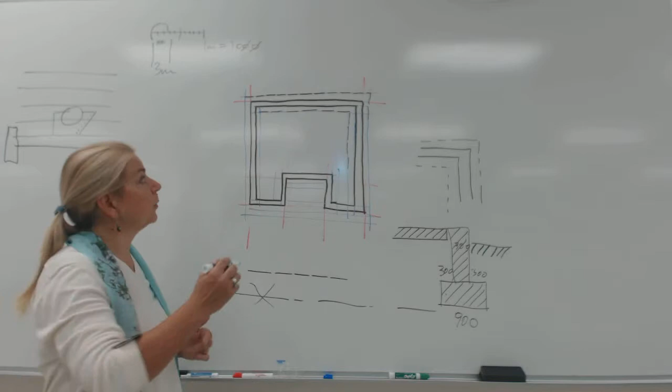Okay, so now we're going to do the hatching, ladies and gentlemen. Hatching is done also at 3 millimeters apart. Every year, students confuse where that hatching is going. We're going to show where the slab is to be calculated. You're going to remember that this is your estimating assignment.

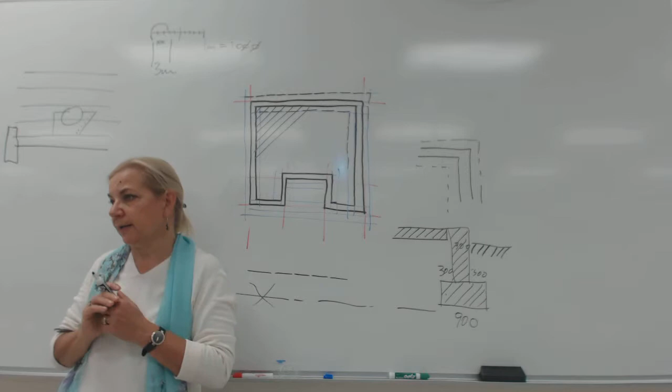So what we're going to do, I'm drawing them darker. These need to be very light lines. You're really going to damage your drawing if you draw the hatching very dark. So your construction lines are very light. Dimensions and hidden lines are medium. The hatching should also be light.

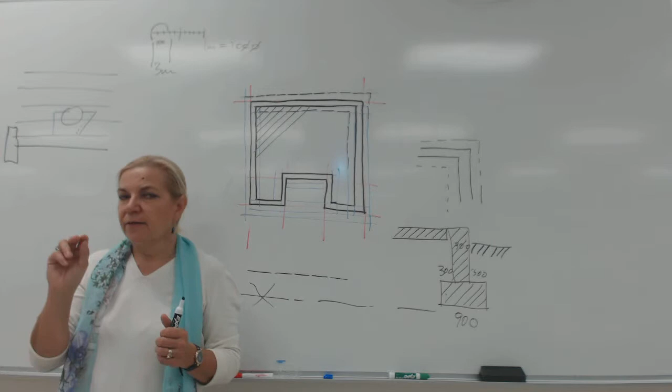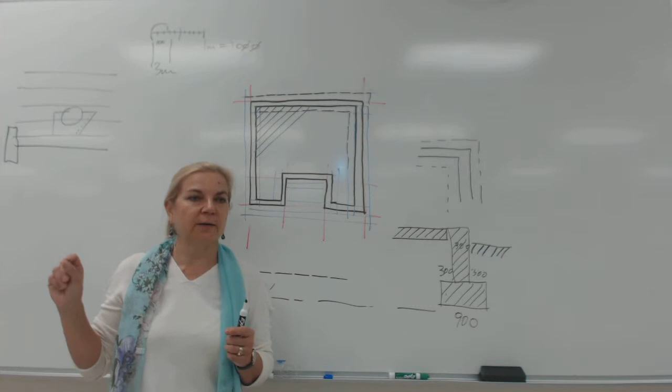So I've asked you for about 3 line weights. If 3 is all you're going to get on this drawing, then do hatching the lightest. Medium would be nice. You know, that 4th line would be really nice. Very light, somewhat light, medium for dimensions and hidden line, and then very dark for your border and your walls, okay?

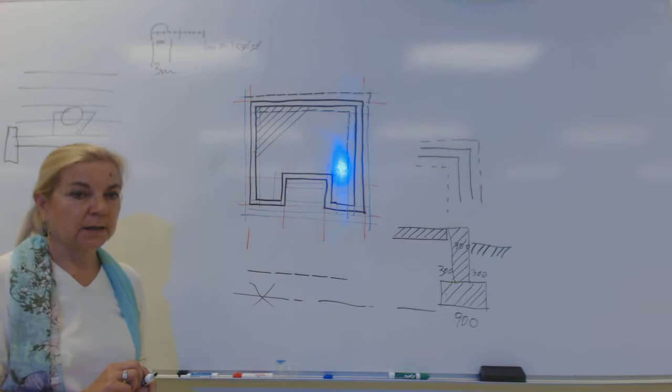Blue. Okay, I'm going to turn this off because it's probably interfering. I didn't realize. We'll see whether this actually helps us or not.

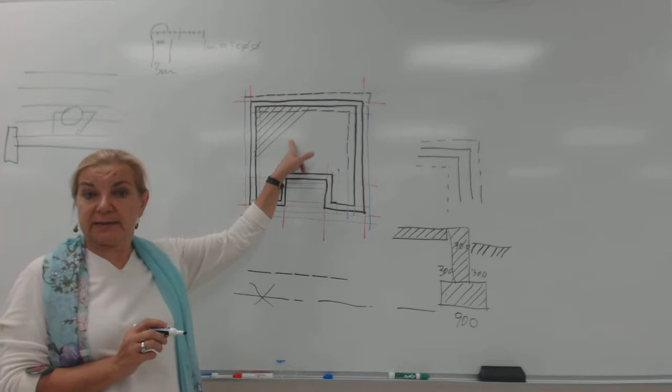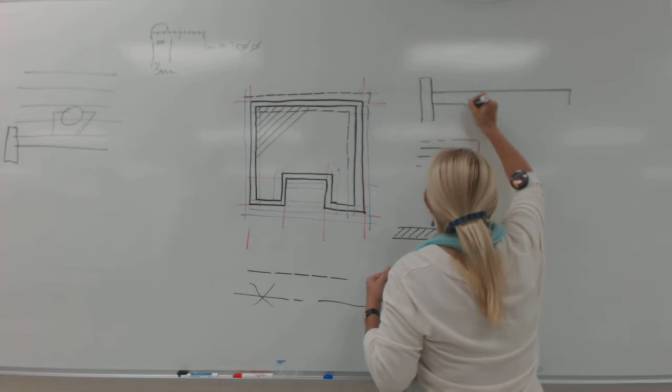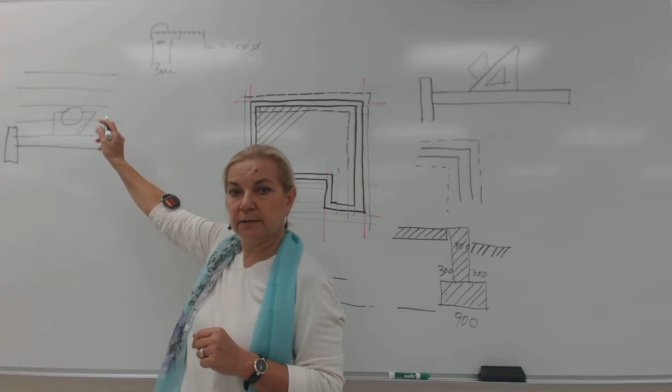Okay, so how are we getting this done, ladies and gentlemen? This came from doing it in class and using the lettering guide. This is what we've established, that if you take your 45 set square and place your lettering guide like so with all of these dots here, you can do exactly the same exercise as we did here on 45. Because now you're going to be dragging your pencil this way, getting lines on 45.

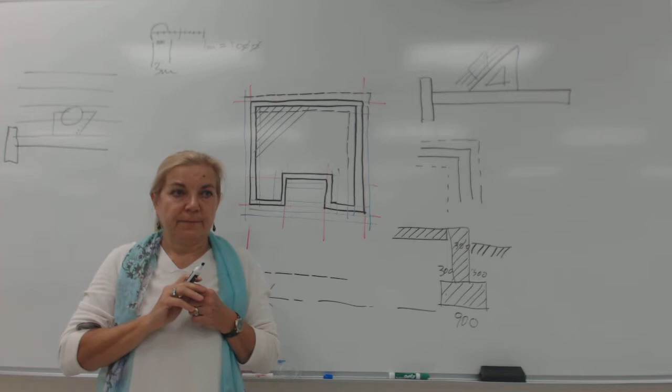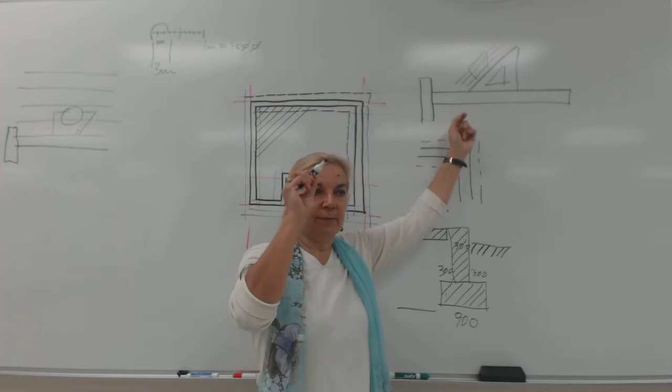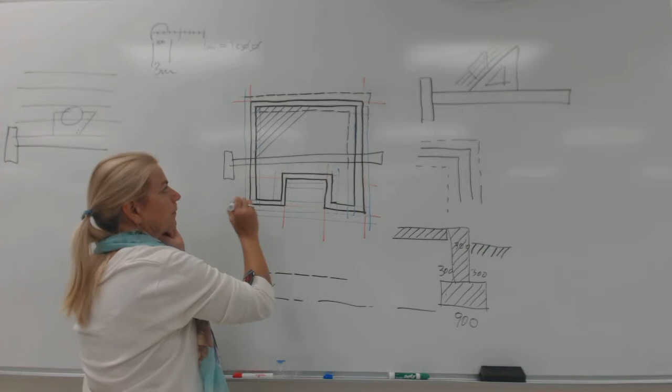Okay? So again, against the T-square, you're going to place your 45 set square like we did last week. Then you're going to place your lettering guide with the 3 millimeter apart setting. Sharpen your pencil, and that setup will happen here. So I'm going to draw it right over our drawing. You have your T-square, you have your 45 set square, and then you have your lettering guide with all of these dots, and you will be going back and forth.

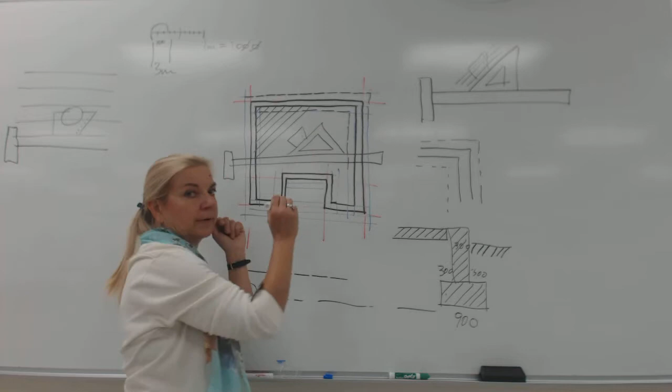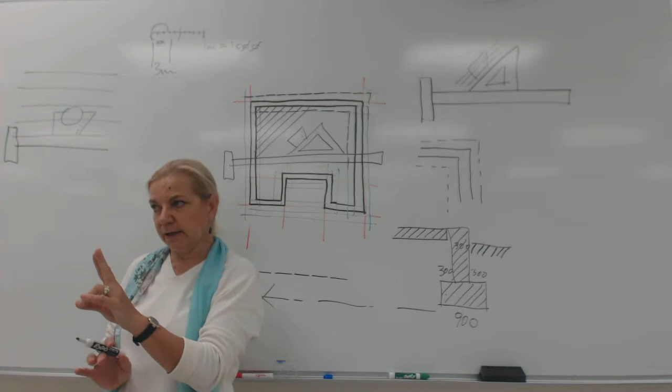The trick here will be to keep everything stable. Pushing with your hand on the T-square, pressing it down so it doesn't go anywhere. Holding with the right hand your set square, and then holding your lettering guide. But students manage it, and every year those who follow this instruction get fabulous drawings. Students who don't get fabulous drawings have measured these points, and they have blips all over the place, and they are missing the points anyway, and the lines are not even.

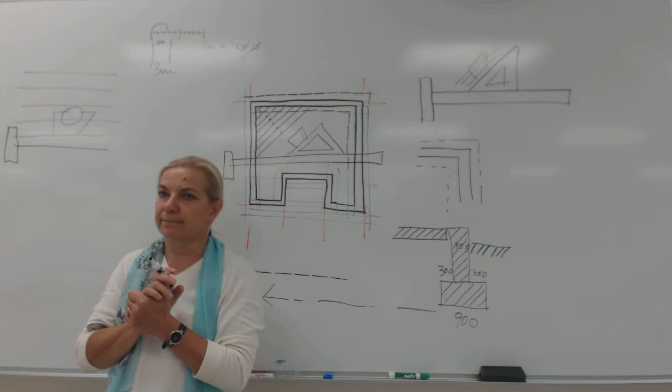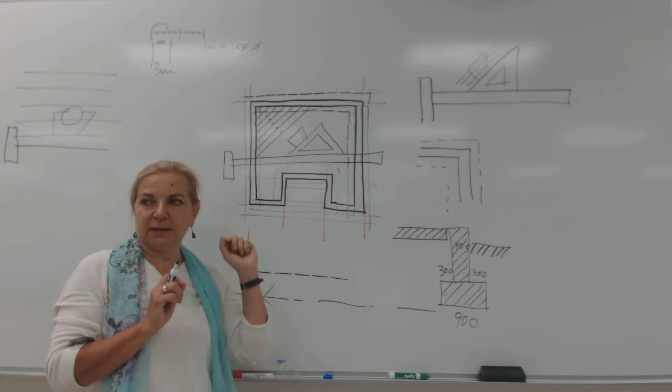After this exercise, it is my sincere hope that that 3 millimeter distance is going to stay in your head. The printing letters on your drawings are 3 millimeters. Your hidden lines are 3 millimeters. Your hatching is 3 millimeters. Lots of things on your drawings will be 3 millimeters. And you want to have it in your head.

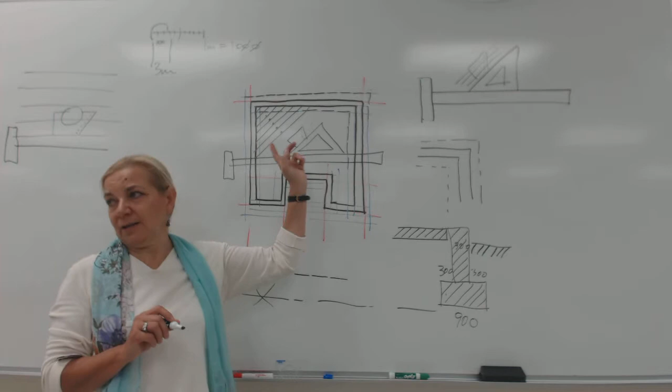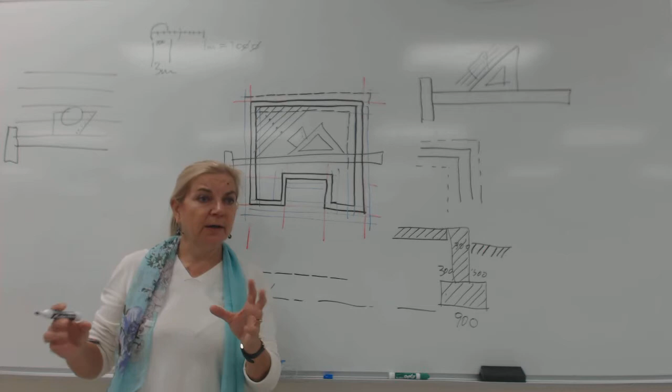Meaning, eventually, as an experienced drafter, you would not be using the lettering guide for those 3 millimeters. You would just go at it and hatch. And I can do it. I can make hatching like this on a whiteboard or on a drafting board, just eyeballing those 3 millimeters. How you get to that point is up to you. But as you're doing it, maybe the last building, try to do it without any tools and see if you've now mastered the 3 millimeters and can eyeball the dimension and hatch it quickly.

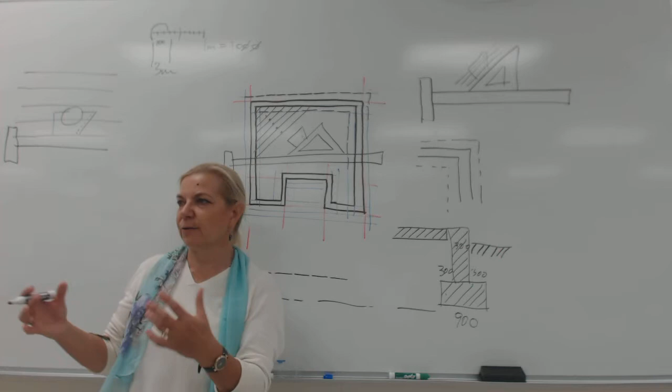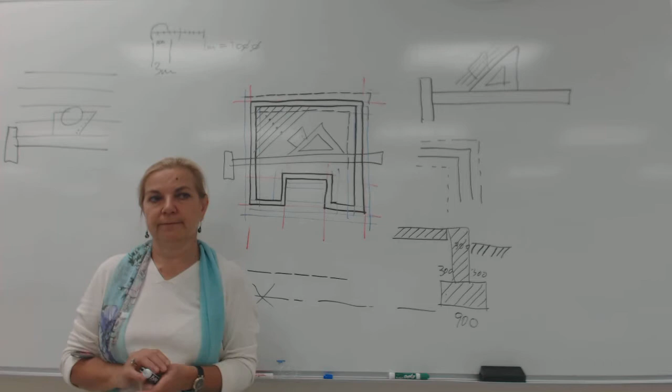Because again, if you start your job and you're paid to do this, you want to be able to do it fast. Using all these tools is great to get there and to learn it, but you have 2 objectives: make the fantastic drawing and then learn how to do it quickly. So you're welcome to practice all of these techniques. We have 3 buildings. Maybe the first one you measure, maybe the second one you use the lettering guide, and the last one you eyeball. But pay attention to all of these techniques so you can pick the best.

The last, ladies and gentlemen, is dimensioning. Okay? So the very last item that should go on your drawing is dimensions that are descriptive. On other drawings, there will be notes as well. So after we do the printing exercise, we will be also adding notes.